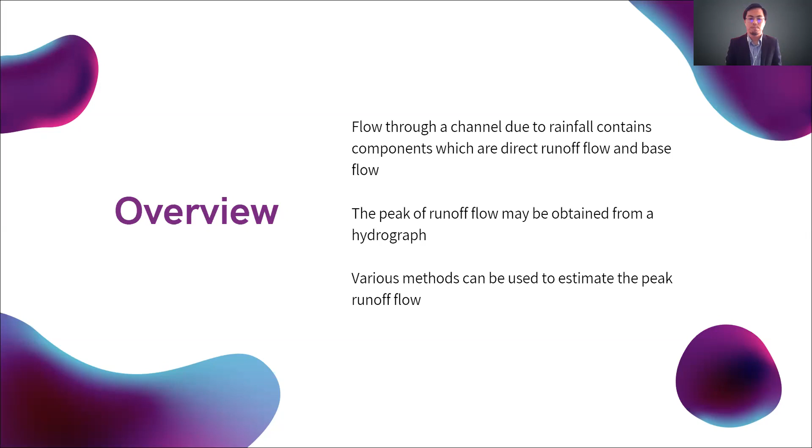Next is the problem statement. The problem statement for my FYP is that the application of the rational method in estimating the peak runoff flow has certain limitations. With these limitations, it can lead to over design or under design in any hydraulic design that uses the peak runoff flow. Also, the rational method does not take into effect catchment slope, surface roughness, moisture content of the land, and so on. So several assumptions have been made by design engineers to estimate the peak runoff, because they don't have a specific method to use for the estimation.

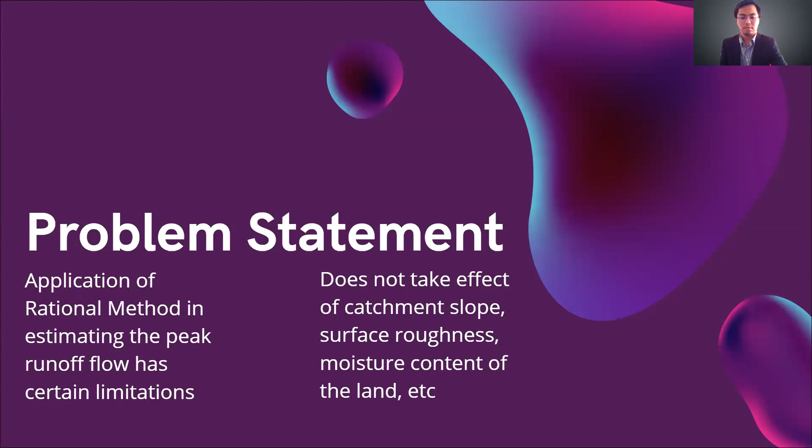So the objectives of my research are, first, to study the differences of the existing methods to estimate the peak runoff flow. There are various methods, so I will study the differences of the existing methods researched by previous researchers. The second one is to investigate the effect of various parameters such as catchment slope, rainfall intensity, surface roughness, permeability, etc. in a lab scale physical catchment. This objective came up because most of the research done by previous researchers is field experiments, so we want to make a lab scale model which can be done in my FYP.

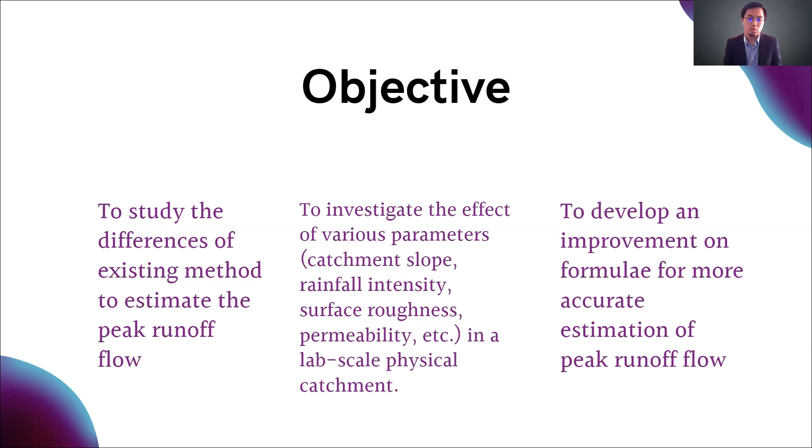And the last one is to develop an improvement on the formula for more accurate estimation of peak runoff flow. With consideration of the parameters taken into account in my FYP, it will improve the accuracy of the estimation of peak runoff flow.

The second part is the literature review for my FYP. In this review, various methods have been researched to understand the differences and also the parameters used in each specific method. The first one is the rational method. This is the most commonly used. It is usually used for small drainage in urban areas, but it also has some limitations: it is obviously not suitable for large areas, because this method also assumes the rainfall intensity to be uniform. The second method is Hydrological Procedure Number 5.

This hydrological procedure was done by the Department of Irrigation and Drainage of the Government of Malaysia, related to flood estimation in small rural catchments in Peninsular Malaysia. So this method is for use in small rural catchment areas. And the statistical rational method has been included in HP 5 to investigate the relationship between the peak discharge and the design rainfall at that specific place of research.

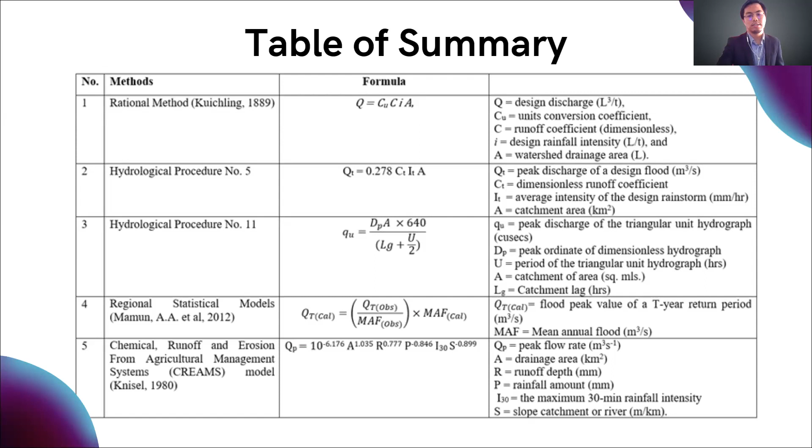The fifth one is the chemical runoff and erosion from agriculture management system, also known as the CREAMS model. So this method, as we can see, has a lot of parameters such as rainfall amount, runoff depth, and also the maximum 30-minute rainfall intensity. So they use regression analysis to come up with this formula.

Number 6 is Fu et al. This research was done in China. In the research, it uses runoff depth and drainage area as the parameters, and in the catchment they identified the steepness of the area to be about 40% to 67.5%, and it is also limited to the drainage catchment at that specific area in China. One of the methods to check the accuracy for this method is a comparison with CREAMS, which I explained just now.

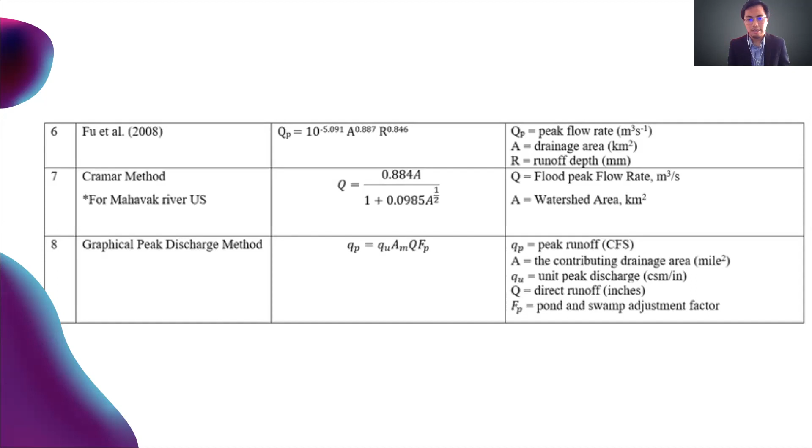And the last one is the graphical peak discharge method. This is used in the USA, and it also includes the pond and swamp adjustment factor. So the higher the value of the factors, the higher the value of the peak runoff.

So next is the proposed methodology in my FYP. This methodology has a flow chart. The first step is to identify the parameters involved, based on the various research explained in the literature review. So I analyzed what parameters are most suitable to be put in this research. Then we choose the range for the parameters that have been identified. Then we set up the experiment, record the result, and repeat the experiment 3 times to ensure the consistency of the result, and also repeat the flow using other parameters.

The apparatus used for this experiment is the rainfall hydrograph apparatus FM03 by Solteq. This apparatus can be found in the Kulliyyah of Engineering, in the Lab of Hydrology and Hydraulics. So we will use this apparatus to do my research.

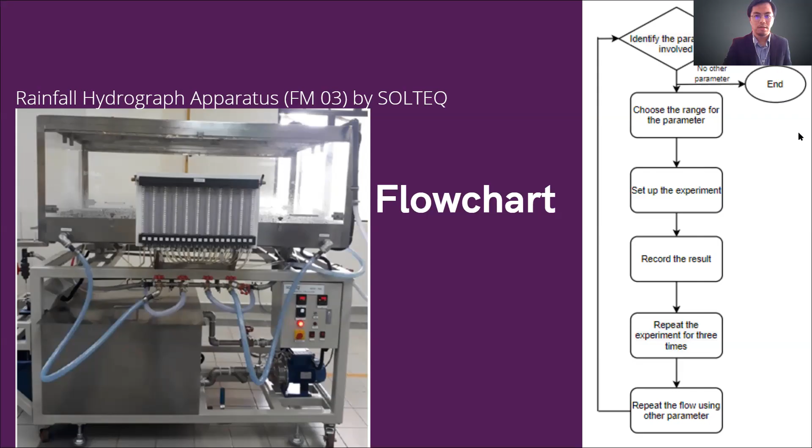So these are the final proposed manipulated parameters that I concluded to include in my research. The first one is the slope catchment. Three degrees of slope have been chosen for this research: the first is 5 degrees, the second is 15 degrees, and the third is 25 degrees of slope catchment. The second parameter taken into consideration is rainfall intensity, proposed from 30 mm per hour to 80 mm per hour.

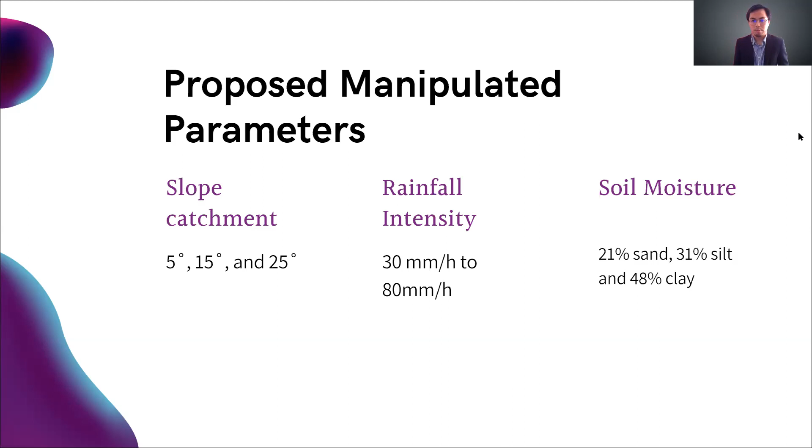And the last parameter is the soil moisture. The soil proposed for this research is 21% sand, 31% silt, and 48% clay.

So in conclusion for this presentation, it can be clearly understood that one of the objectives for this research has been achieved, which is to find the different methods used in previous research, and what parameters can be used for this research.

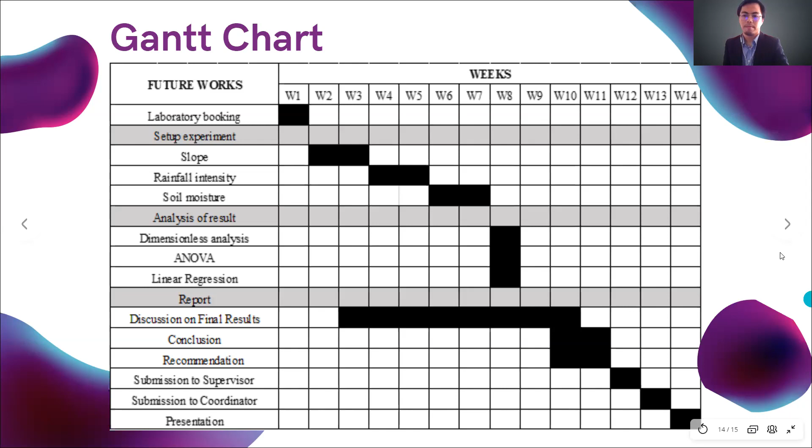And also in the conclusion, I will explain the Gantt chart, which is the future work for FYP2. The first step is booking the laboratory in week 1, and then setting up the experiment. This experiment includes 3 parameters, which are slope, rainfall intensity, and soil moisture, and then analyzing the result using the 3 proposed methods, and proceeding with the report, submission, and also the presentation for FYP2. And I think that's all for me.